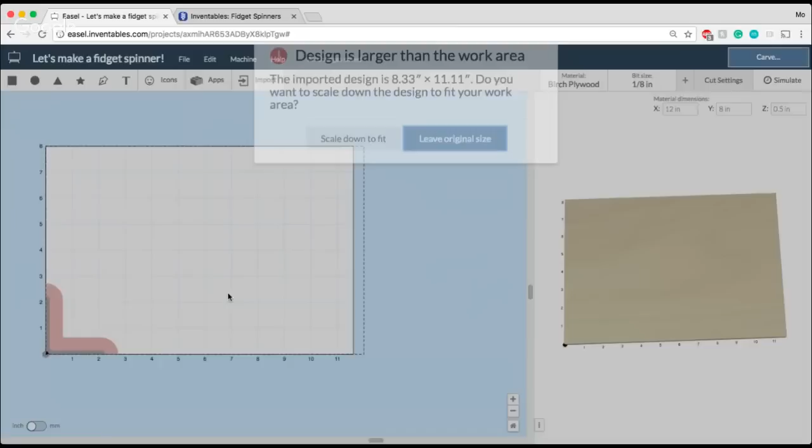I'm going to import two different files, because first I need to make the shape itself, and the second one I'm going to use as the image that will be on the fidget spinner. So to start off, we're going to import this one, and we're just going to leave it at the original size. We'll have a giant 8-bit Mario here. That's okay. And now I'm going to import my second Mario image.

But this one I'm going to import a little bit differently. I'll drag him in, and because I want to get this set to an outline, I'm going to bump up my threshold to 100% or 99%, so that what I'm left with is just this giant block showing the shape of Mario. Now I'm going to do trace outlines. So when this imports, it's only going to import the outline of the shape that I have.

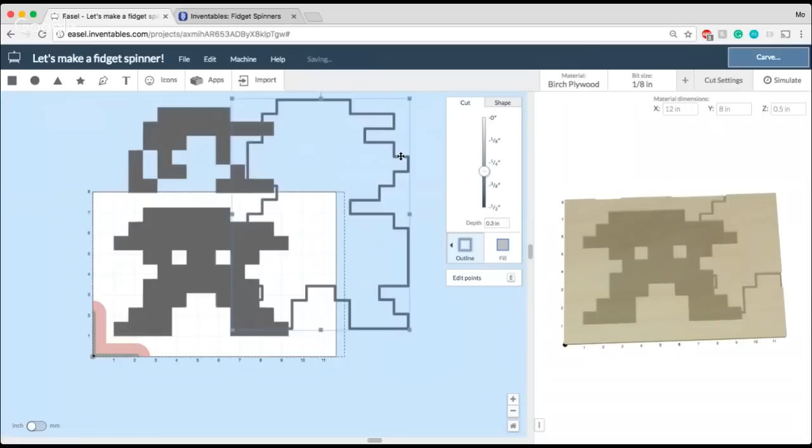And because I'm going to import this directly on top of the other one, you can see that what happened was it imported directly onto my other shape, which is exactly what I want. So first what I'm going to do is, let's go back, let's change my material really quickly.

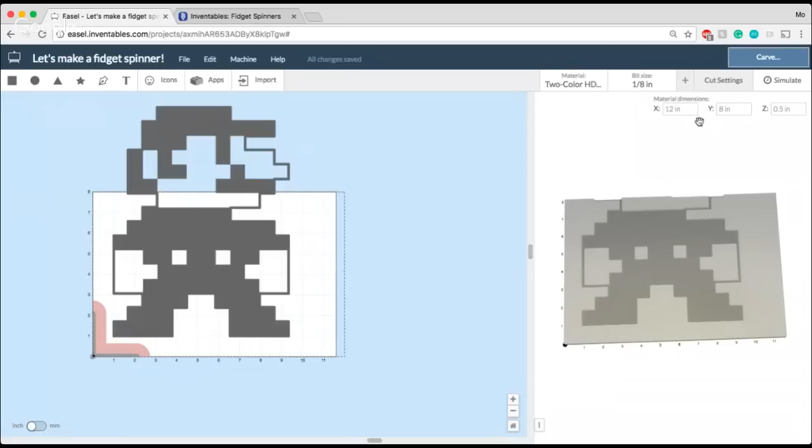The material I'm going to be using today is going to be 2-color HDPE. This is a great material for fidget spinners. It carves really quickly, and we also love it because of the two-tone that you can get by carving down past the first layer. And next, my material size is going to be one of our 6-inch tiles that we have.

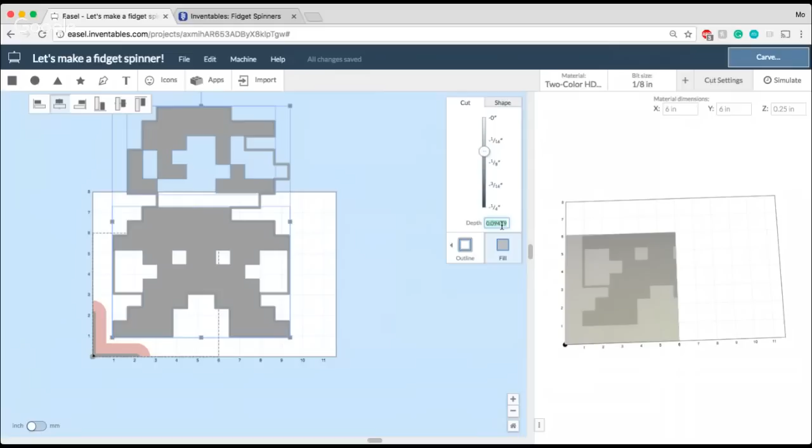And I'm going to go ahead and set the depth of this. So this is going to be the shape of the design that I'm carving, so you can see Mario's face and his sweet, very authentic overalls. I'm going to set this to 0.03 inches. So when I carve my Mario fidget spinner, I've used a piece of white on red HDPE. So in carving that 0.03 inches down, I'm going to reveal this red.

You can see here kind of the two colors that come on this HDPE. So by carving the first white part of that product down, I'm going to reveal this red underneath. That's how I can get those two colors. All right, let's go back in Easel and let's continue making that fidget spinner. So I'm going to set that to carve down, but I need to make sure that my outline is set to cut all the way through the material.

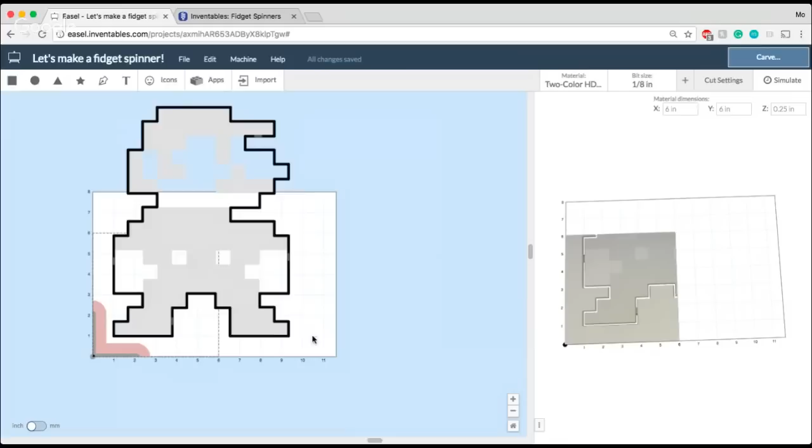Now, for fidget spinners, we do recommend using tabs. And you can see my tabs have already imported here. Tabs make it really easy to make sure that nothing goes wrong with your fidget spinner when you are carving it out, because you need to make sure that those bearings are going to fit really precisely. Otherwise, you're not going to get that really gratifying spin whenever you use your fidget spinner.

All right, so now I'm going to scale this down so that my little Mario here is ready to rock and roll. There he is. So you can see this dotted line indicates my material size, and the whole shape here is indicated by the wasteboard. In this case, because I'm on a Carvey, I've got my smart clamp here, and I need to make sure I don't carve inside of this area.

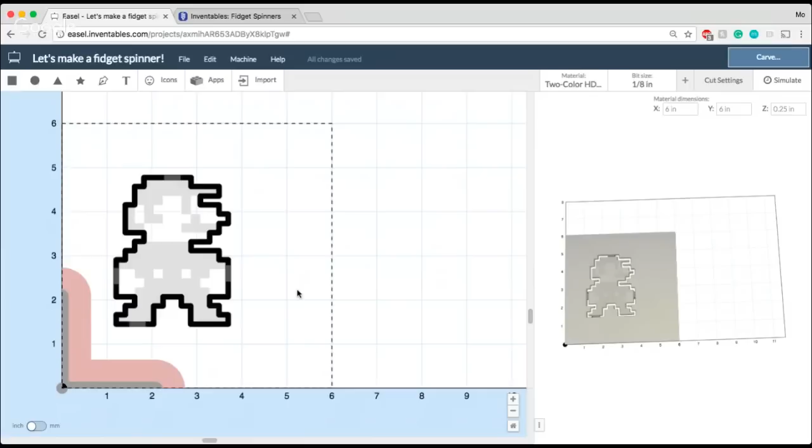If you're using an X-Carve, you will not see that on your wasteboard, but again, I've got Easel set up to design with Carvey right now. So that's why you're seeing this red smart clamp here. So I've got Mario here, but now I need to import the holes that I can use for the bearings.

So again, I have to thank our awesome developers here at Inventables for creating the fidget spinner app. We've had this for a couple weeks now, but we've made some changes that I think you guys will find really interesting to be able to make and customize your own shapes with the fidget spinners. So there's a few different things we need to set in order to use the fidget spinner app. One of them is wall, one of them is arm length, and one of them is number of arms.

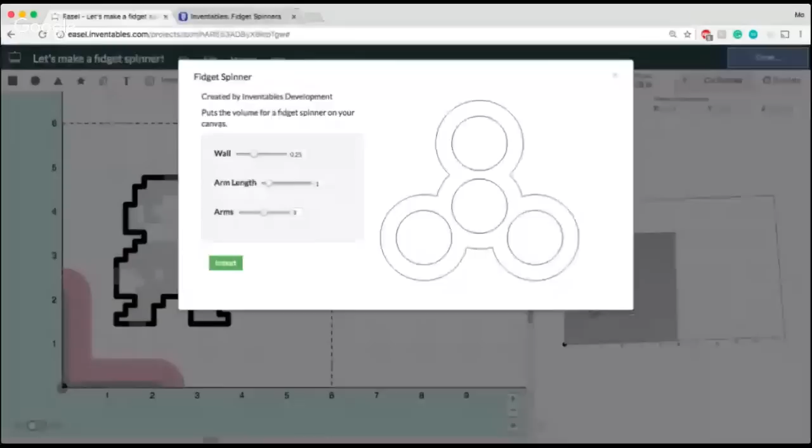So if you're new to fidget spinners, it's a little bit tricky to say what those parts are. So I'm going to use this little example here to show you the different parts on the fidget spinner. The first one that we need to know is going to be arm length. That's basically the distance between the bearings on each of the arms. In this case, this fidget spinner has 3 arms.

The arms are indicated by the number of bearings off of the center bearing. So in this case, this is our center bearing, and there are 3 bearings on the outside. So this one is a 3-armed fidget spinner, and the arm length is indicated by how far apart these bearings are from one another.

The other piece of terminology that we need to know is wall, and that wall is just the thickness of the wall on the fidget spinner surrounding the bearings on the arms. So when you set the wall length, you're not only going to be changing this distance from the arm bearing to the outside, but you're also going to be setting the wall distance between like this little cranny here between the arms. So that's off of the center bearing. So those are the terms that you need to know when you're making a fidget spinner.

In terms of what we recommend for these settings, it really depends on a lot of factors, but most importantly, the thing to keep in mind is how big your hand is. So I have not very big hands, so I like to have fidget spinners that have thinner walls and the arms are closer together. But you will find that if your bearings are a little bit further apart and your arm length is a little bit longer, that creates a better momentum for when you spin the spinner. So if it's possible to use longer arms, that would be great.

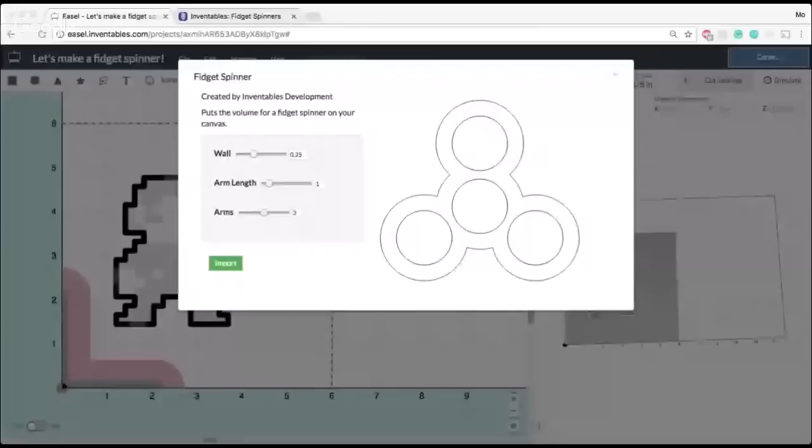All right, so I'm gonna go ahead and just import a standard spinner size. So in this case, the wall is 0.25 inches. The arm length is just 1 off of this bearing. 1 is kind of like the standard that we recommend, but if you want to go greater than that, you can see how far apart these move, or if you want to get them closer together. You don't want to get them so close that they're touching. We try to prevent that by having there be a little bit of material between the bearings, but you can override that. So just use this image as an indicator of how close your bearings are to one another, just to get some spatial arrangement in your head.

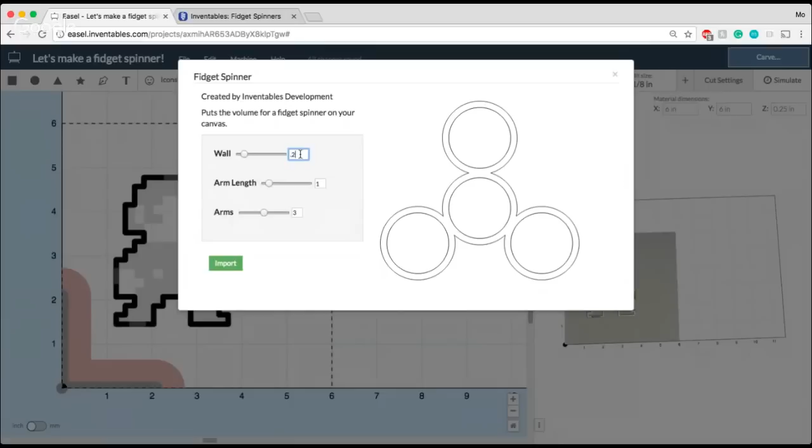And again, arms, in this case, I'm going to use 3, but if you'd like, you can go up to 4, or you can even get really crazy and find a way to add in a bunch of arms if you really wanted to. So again, the arms indicate how many bearings you're going to have off of the middle spinner. So in this case, I'm just going to set this back to the standard size here, and I'm going to import the shape. Now, a couple things happen when I import the shape. For one, it put it right over my Mario. I don't really like that, so I'm going to move it over here. But the cool thing is that I don't need to keep this outer shape at all. So I'm just going to select that, and delete that off of my canvas. So that way I don't have to worry about it.

But what's nice is I have my 3 bearings set up in the exact arrangement that I want them to be on my spinner. It's really, really important, and I cannot emphasize this enough, that you should not adjust the size of these circles under any condition when you are making your fidget spinner. Right now, these circles are designed to be used with 22 millimeter bearings. So there are bearings that have 22 millimeter diameter running across them. Those correlate to the bearings that we sell on our site, so you can use these with the bearings that are for sale on our site right now if you'd like. But if you find bearings elsewhere, just know that these circles are designed to be used with 22 millimeter bearings. Now, I'm going to go ahead and scoot Mario.

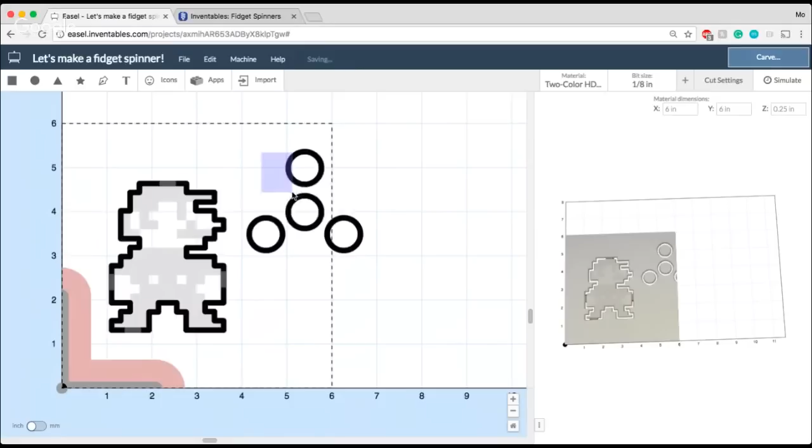I'm going to leave him right here. But what I have to make sure of is when I import my Mario, you see right now if I were to carve this out, as indicated in my preview pane, this isn't going to make a great fidget spinner because my bearing is off to the side of Mario, and he's interfering with the bearings.

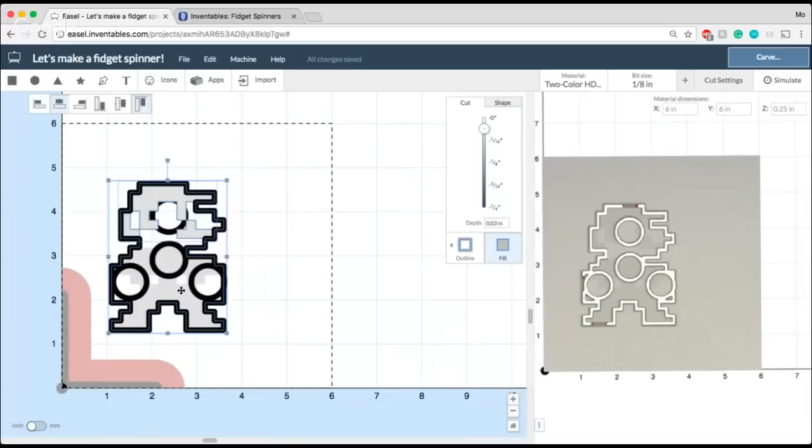So it looks like I need to make Mario a little bit bigger. I'm going to select all the shapes of Mario here and use this to scale him up a little bit, just like he's eating one of the power mushrooms or whatever.

So now he's a little bit bigger, and you can see from my simulation that there's a little bit of leeway here. I might want to make him a tad bigger to make sure I'm able to clear all of these parts easily.

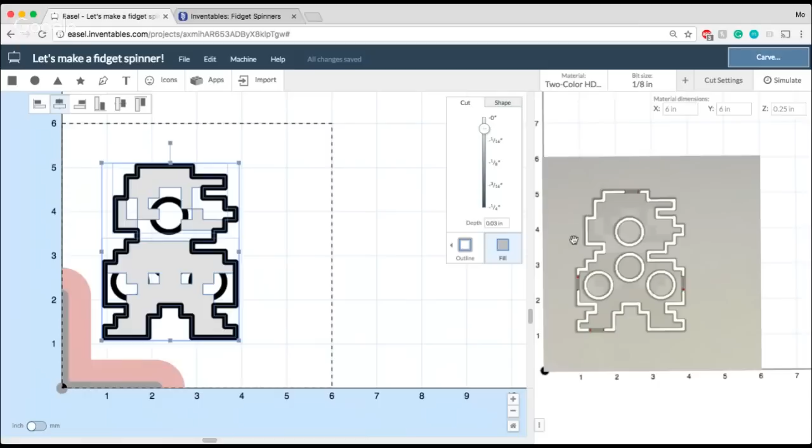You don't want to get your bearings too close to the edge of any of the sides of your material, or you'll find that they might break. That happened with the first Mario spinner I made — this part here was just too close to the edge, and when I was putting the bearings inside the spinner, I had difficulty, and the edge actually broke. In this case, it looks like there should be enough clearance so my bearings fit all right and don't break my spinner, and they still work.

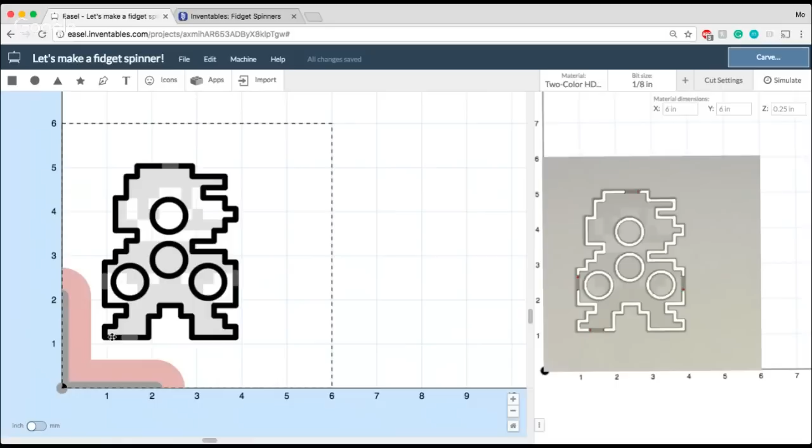And it looks like I'm looking at about a 4-inch tall spinner, indicated by the measurements here on my wasteboard, and that's a pretty good size. I think that's going to make a well-carved spinner.

So that is the gist of how to get started with a spinner if you wanted to make a fun shape. I had a lot of fun making my Mario spinner — I had no idea what I wanted to make and decided on an 8-bit Mario, and it worked out really well.

If you're a professional fidget spinner enthusiast, you really value a well-balanced spinner, one where the weight is distributed evenly and it spins for a really long time. That makes for a really gratifying fidget spinner, but I'm more of the notion of making things kind of fun and quirky.

So that's how I ended up with my Mario spinner. What's nice about the Fidget Spinner app is that I can still make something like this where the shape isn't symmetrical, but because the bearings are placed in a way that's well balanced and evenly distributed, thanks to the app, it still spins pretty nicely despite not being a symmetrical shape. That's the advantage of using the Fidget Spinner app, and one reason I'd encourage you to do that.

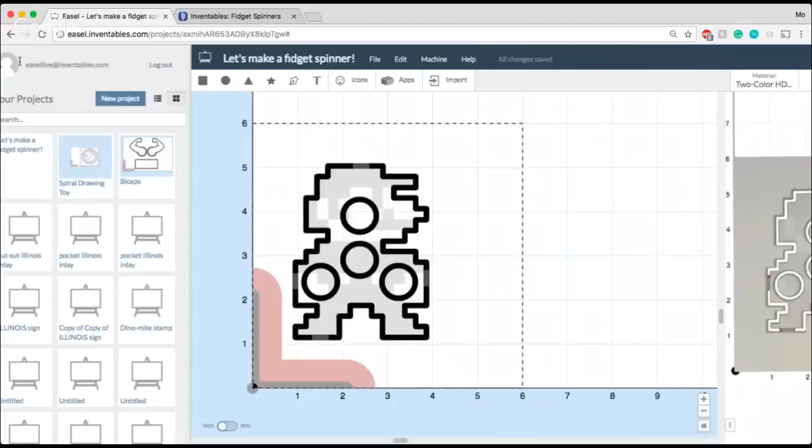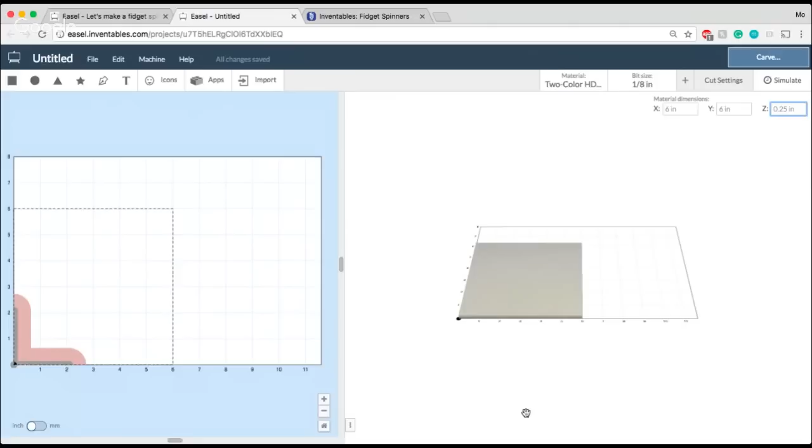So I'm going to click on Easel and make a new project. I'll set my material again to 2-color HDPE, and use an 1/8 inch bit, set up the same as my other one. Here's my design pane that I'll be working in — let me get that set up for you as well so you can see it. The first thing I'm going to do is import a shape from the fidget spinner app.

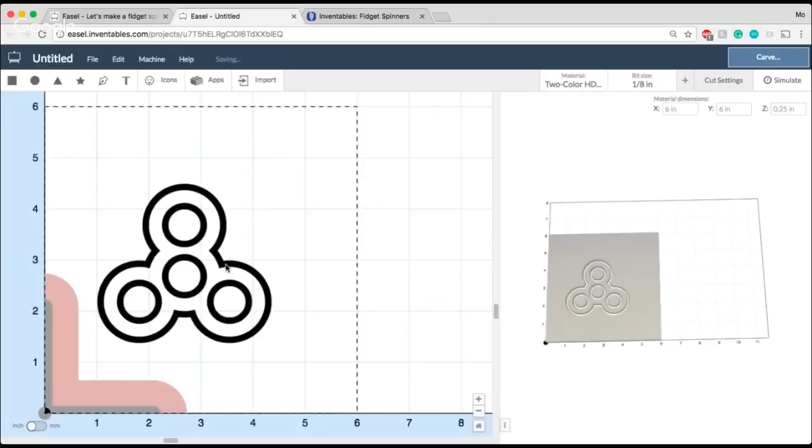So I'll go back into our apps library and go to the fidget spinner app. I'm just going to use the standard size for this particular application, and just like last time, I'm going to go ahead and delete the outside shape.

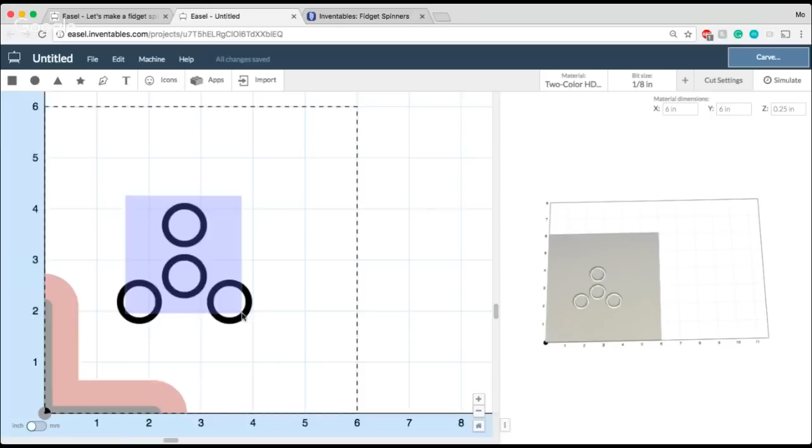Before we go any further, I want to show you guys something new we've implemented in Easel that's really helpful for making this app, and that's our pinning feature. Our developers created this cool tool that lets you pin a shape directly onto the work area in Easel. In this case, these bearing holes, I don't want them to move while I'm designing, because right now they're perfectly aligned to keep my spinner symmetrical and well balanced.

So I'm going to go up into Machine, and into Advanced Settings. You can see I've already enabled some of our other beta features. If you're interested in adding these beta features into your Easel account, you can simply check these little check boxes and they'll get added in. If you're looking for more information, there are question bubbles that pop up that you can check out, and I think we also have support articles catered around some of these different capabilities.

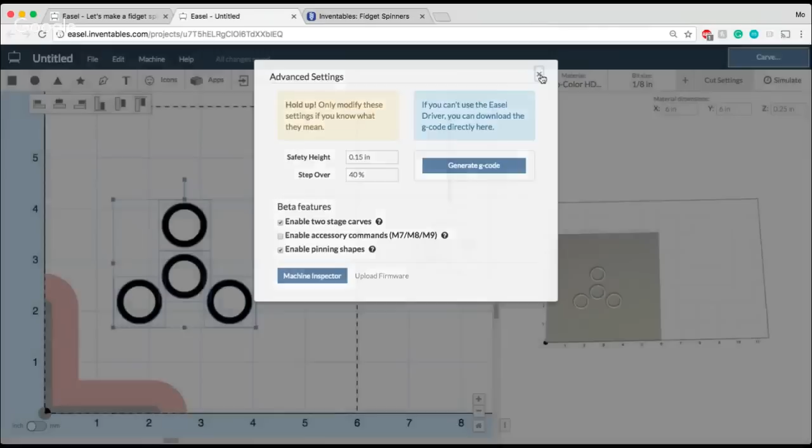So in this case, I'm going to be using the pinning shapes feature. I've got that activated, so I'll go ahead and close this out. Now when I go into the shape menu, I have this little pin button that pops up. So what does this do exactly?

I'll show you. Let's say I want to pin this shape. Right now you can see the pin button has been activated on this particular shape. Now if I select all these shapes and move them all over here, you can see everything moves except the one shape I have pinned onto this spot on my design area. So I'll undo this. One reason this is helpful is if you're trying to build a project that requires you to move parts around parts that you don't want to move, this is a great way to keep the parts that you don't want to move in place.

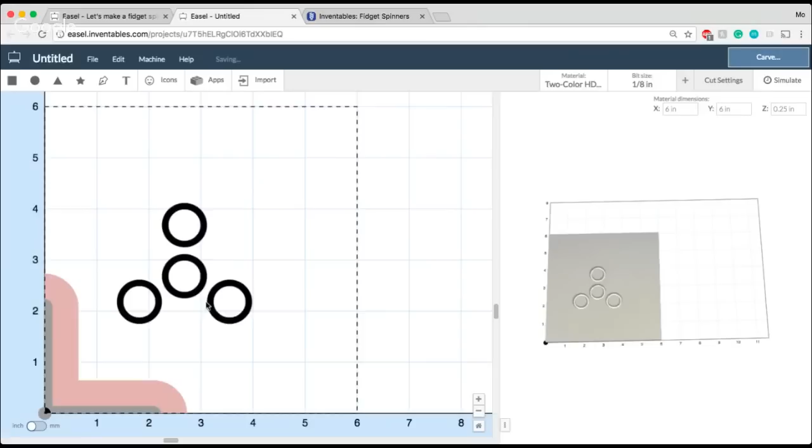So that's exactly what I'm going to do here. I'm going to go ahead and pin all of these shapes to my work area. Go ahead and select them. I think I need to unselect this guy first, and then I'll go ahead and pin everybody down. All right, cool. So you can see now if I try to click and drag and move these shapes, they're not going anywhere. They're going to stay exactly there, which is precisely what I want.

But what's cool about this is he taught me a trick in Easel to make a design like this, which is symmetrical, that doesn't require you to import a shape or design a shape in an outside program. So let's go back into Easel, and I'll show you how to make something along the lines of this propeller-shaped spinner. Going back here, what we're going to do is I'm going to start by making a rectangle.

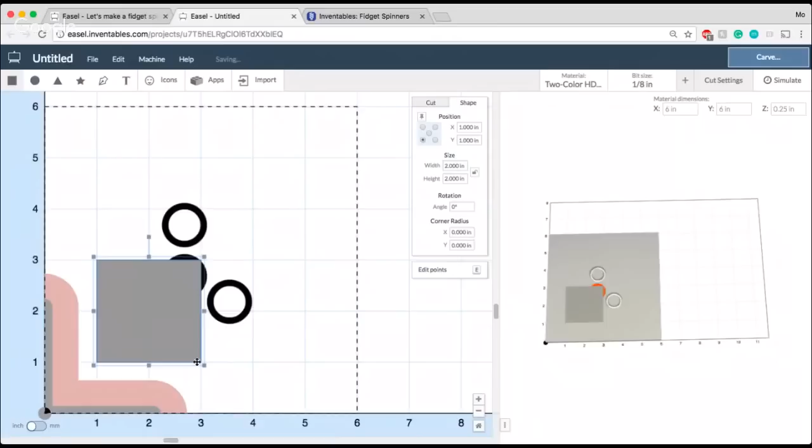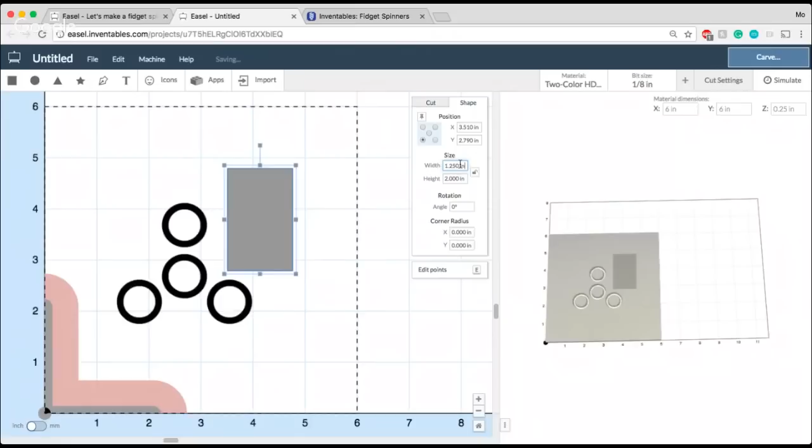My goal here is to basically create the 3 arms by using this rectangle shape. So my rectangle, I'm going to use the size here and set this to a size that I want to fit around the bearings. In this case, I'm going to make my rectangle 1.25 inches wide, and it's going to remain at 2 inches tall.

Now you can see if I move this to the back, that all this really does is give me a square fidget spinner shape, but I really like David's rounded design. So I'm gonna change my corner radius here.

By the way, if you've never played around with this, this is a feature I've just started experimenting with as well, but it allows you to create a specific radius along the edge of the corners of a shape like a square. In this case, I'm gonna set that to half an inch on my corner radius, and it gives me this really nice looking shape, kind of similar to David's curvature on his design. You can also set it to be a lot more curved if you're interested in that, but in my case, I'm just gonna stick with that half inch.

So what I'm gonna do next is use the align tools to make sure this rectangle shape is perfectly aligned over my design here. You can see now, since I selected multiple shapes and used the align tools that pop up, everything stays centered down the middle of the shapes. What's cool is because my bearings are pinned to the material work area, I can set these to move to any place, and it's going to be the rectangle that moves. Notice how the bearings don't move when I use the align tools -- only the rectangle is moving, which is pretty cool.

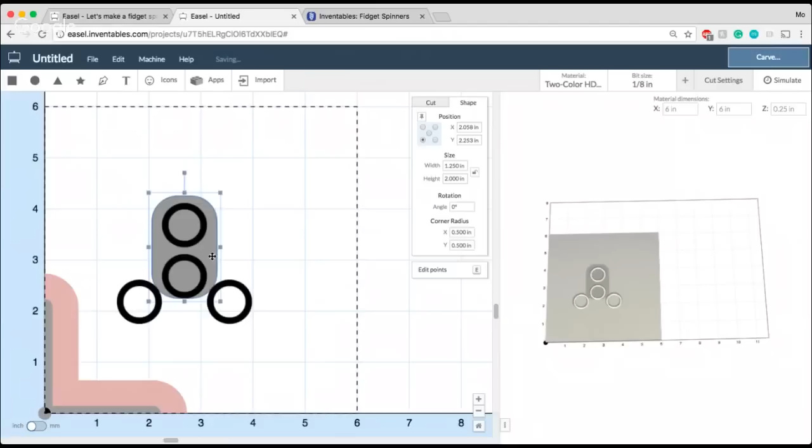So I've got this all set up, and it's centered vertically on these bearings. Now I'm just gonna scoot it up so that the bottom part of my rectangle is at the bottom part of this bearing here. All right, cool. So I've got one of my arms set up.

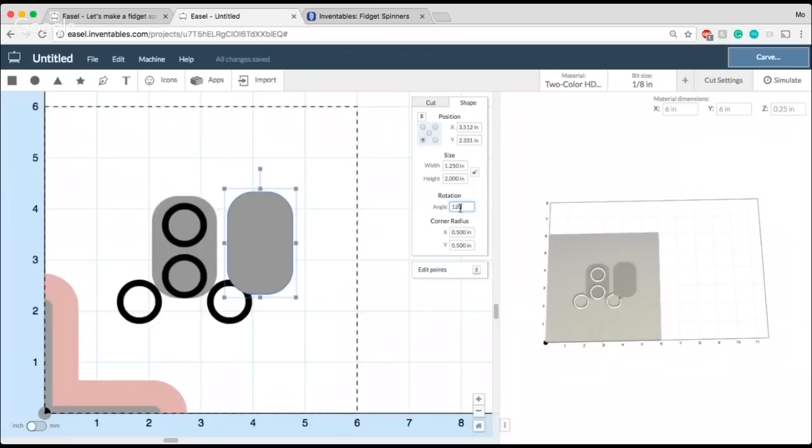Now I'm just gonna use Command C and Command V and copy and paste an identical shape onto the work area here. And what I'm gonna do next is rotate this shape to 120 degrees because I'm working with 360 degrees and I've got 3 arms, so each arm is gonna be 120 degrees off of the other one. I'm gonna send this one to the back as well, and I'm gonna move it forward one shape so I can see the full outline here.

Now I'm gonna use this to align in a similar way to my other arm. You can see I've got the bottom of the rectangle on this edge of the bearing, and then I've done my best to center it through the center of these other shapes. So there's my second arm.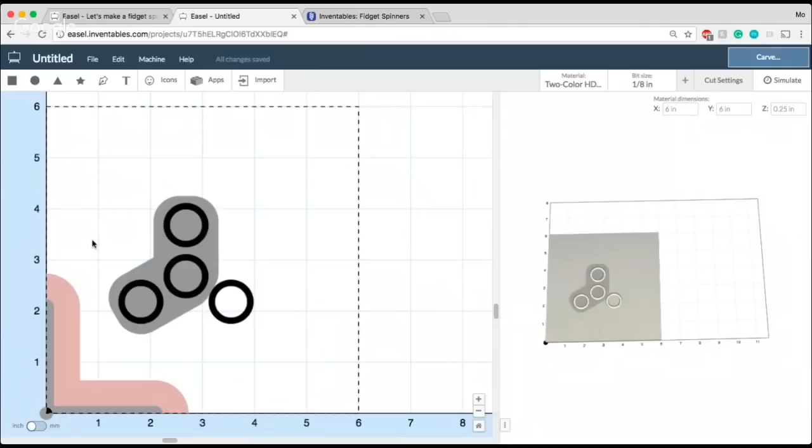Now I'm gonna copy and paste this shape, and I'm gonna set this to 240 degrees, since that's another 120 degrees away. And I'm gonna send it to the back, and then pull it forward 2 steps so that it's on top. And I'm gonna use this to align as well to the bottom of that bearing.

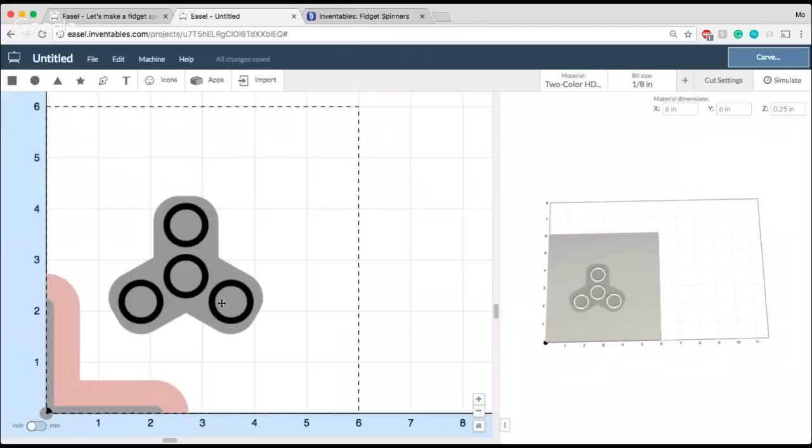All right, so you can see from looking at this design and by looking at my preview menu over here that I've got an outline of the shape I want to carve. Now, one thing important to notice is that because these shapes are all done in gray and black, I don't actually want to carve this particular shape out, because all that's going to do is give me these bearing holes cut out and then the shape just carved into the material.

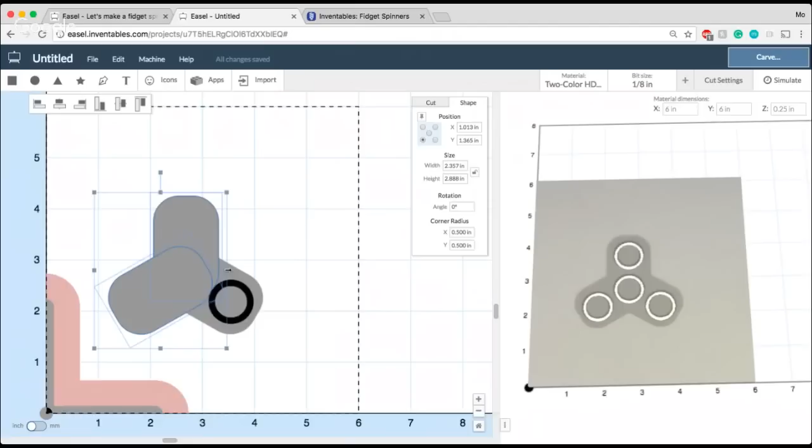So what I'm gonna do is select all 3 of my arms and combine those. Now that they are combined, I can set this to cut on an outline, and when I cut all the way through, I'm gonna get that exact shape I want. If I simulate this, you can see that what my material is going to cut out is going to be the exact fidget spinner I want to carve.

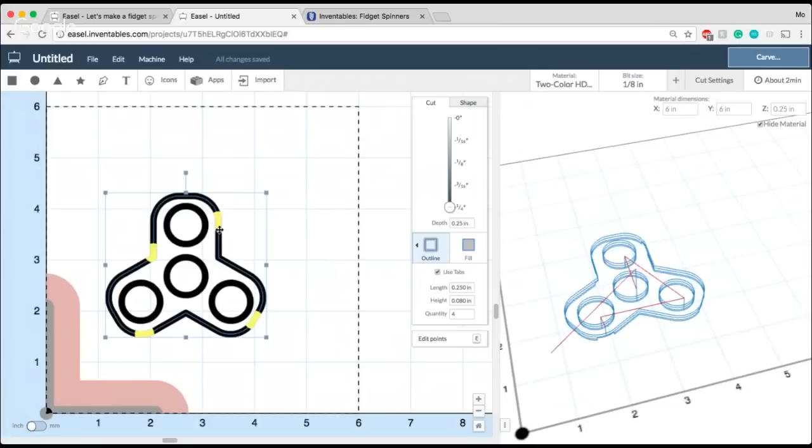You can see the tabs showed up here as well, but some of these tabs are not located in the best area. If you find that when you're using tabs they don't end up in an ideal place, like a corner or on a circular edge, feel free to click and drag them to a spot on your design that's going to be easier to remove once the design is cut out. So that looks pretty good, pretty well distributed -- and that's gonna be my second fidget spinner that I can carve.

Now, the other thing that's cool about this kind of technique is, let's say you wanted to make something like David's spinner, where instead of using a 22mm bearing, he used tungsten. So you can also put in a different shape here if you wanted to use some other kind of weight on the arms of your fidget spinner bearings.

And as long as you use the angle rotation here, that 120 degrees, or however, if it's a different increment, if you're using a different number of arms, then as long as you keep that rotation the same and keep those off of the center point the same, then you can definitely go ahead and use those to create fidget spinners of any kind of shape.